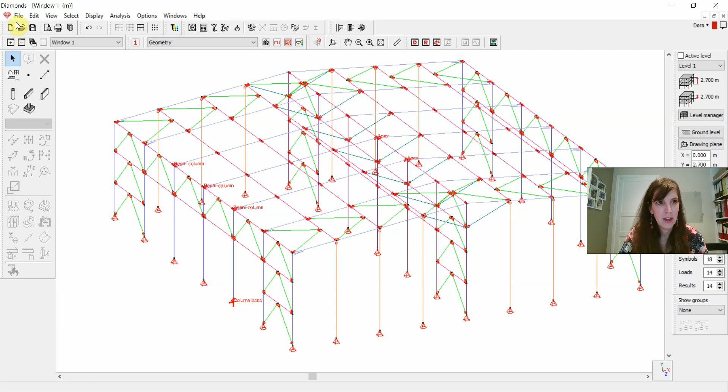Now we are sending this entire model to BIM Expert. Here we are, and we're exporting this to Idea Statica. I'm choosing the latest version of Idea Statica, so this is 20.1, and I'm using the physical model. That means we are not using the axes of the beams, but we are really using the complete beam, column, bolts, welds, and so on. And I'm exporting towards Idea Connection.

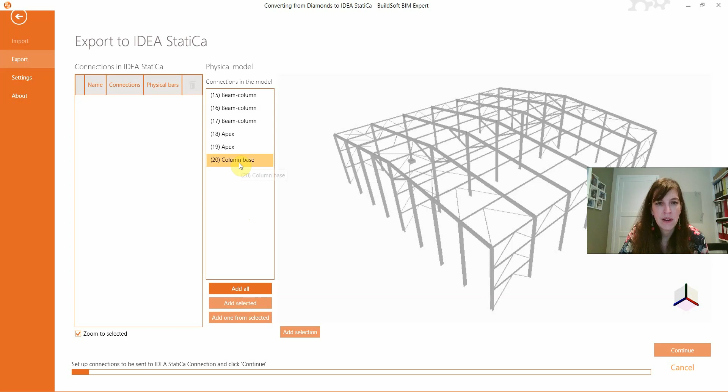Now here in the BIM Expert viewer, we can select nodes to be synchronized to Idea Statica. Let's first look at column base, and you can see that the bolts are present, the end plate, and so on. So I'm selecting this connection, and I'm adding it to our nodes to be exported. Next is an apex connection. I add it to the selection, and we'll also take along a beam column connection. And let's continue. Okay, and let's just choose a folder to save it in.

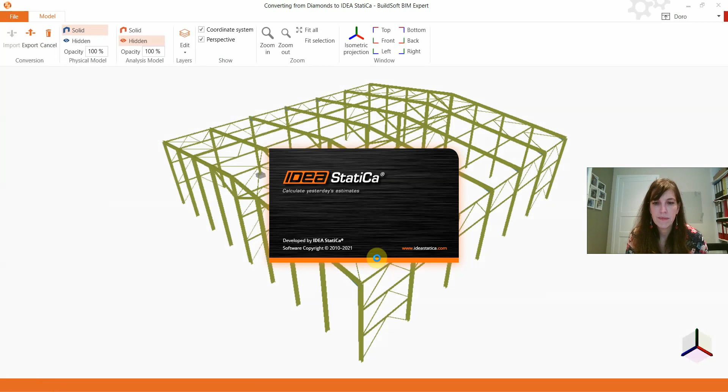Now Idea Statica is being launched. We create a new project, and I will import all nodes that I've selected in bulk in the IDEA Checkbot. Here we are. We have the three different nodes. And let's look at the first connection, the beam column connection, and I open it.

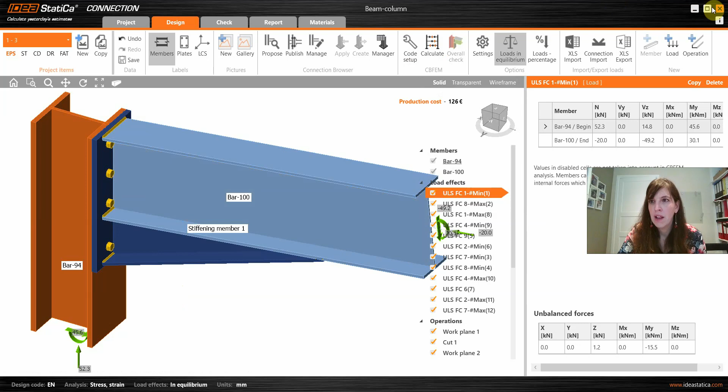Here it is. So we have the complete column, the complete beam. All the loads have been imported, but also the haunch, the welds, the end plate, the bolts, everything is there. So you're ready to calculate. You can click the Calculate button immediately and see how this connection performs in Idea Statica. And this connection was previously designed with PowerConnect. Let's move over to the next one. So I will close this one.

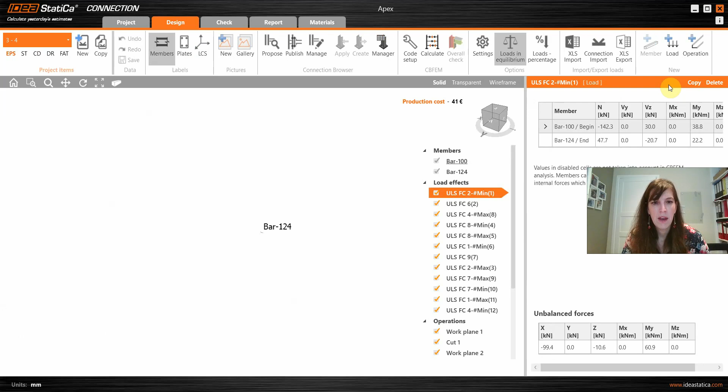We also have the apex connection. And this is of course very similar. All the bolts, the welds, both end plates have been converted to Idea Statica Connection, and you are ready to go, ready to calculate from this connection previously calculated with PowerConnect. I will also close that one.

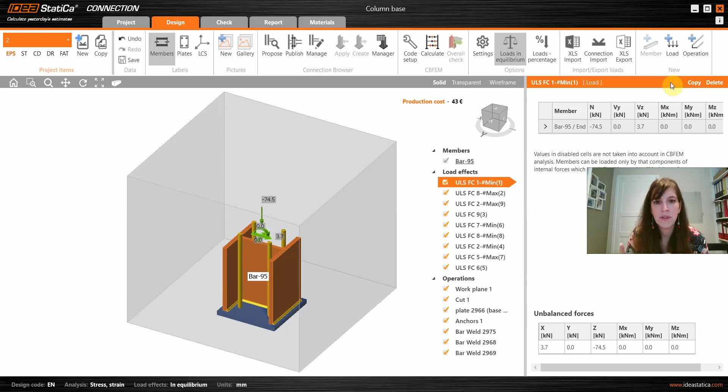And finally, we have the column base. Let me open it also. Here we are. Now for this column base, we just need to do a little modification. Here I'm putting the concrete block at the bottom instead of at the top. And now we are also ready to calculate all welds, all anchors, the concrete block, the loads have been transferred, and you are ready to calculate.

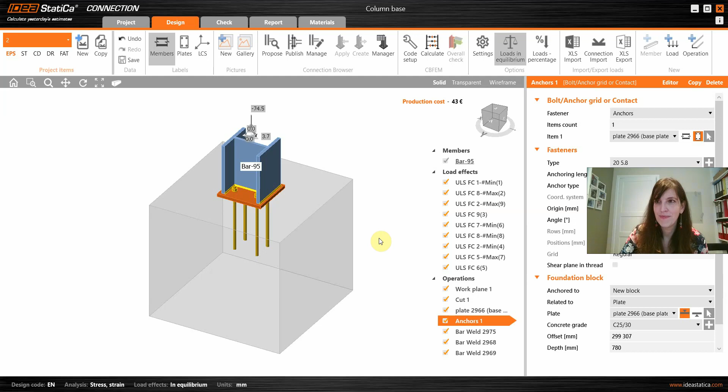And this is really how the workflow Diamonds, PowerConnect, Diamonds, BIM Expert, Idea Statica works.